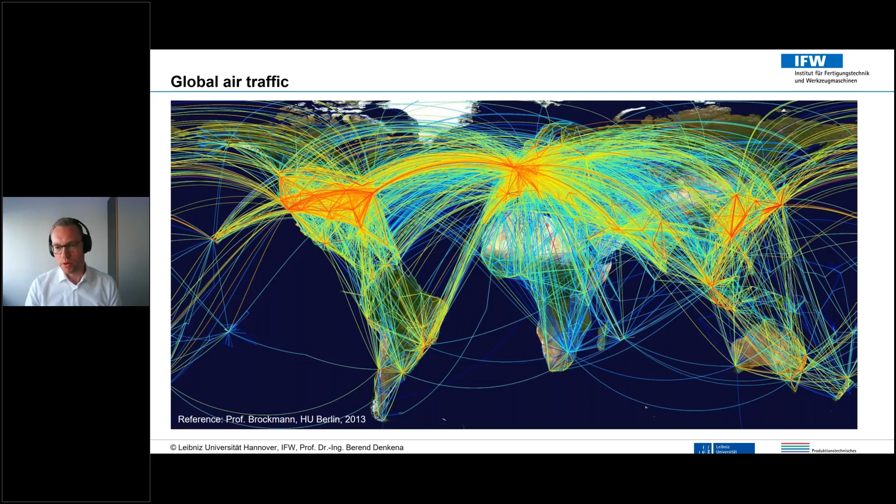So I want to talk here about the global air traffic. This is a picture about the global air traffic in the year 2013. And beside these, a lot of flights which are shown here, we have the topic of manufacturing of aircrafts. When we have a look to that topic, we have two things: first, the manufacturing, and secondly, the maintenance, which have to be economically and sustainable in the long term.

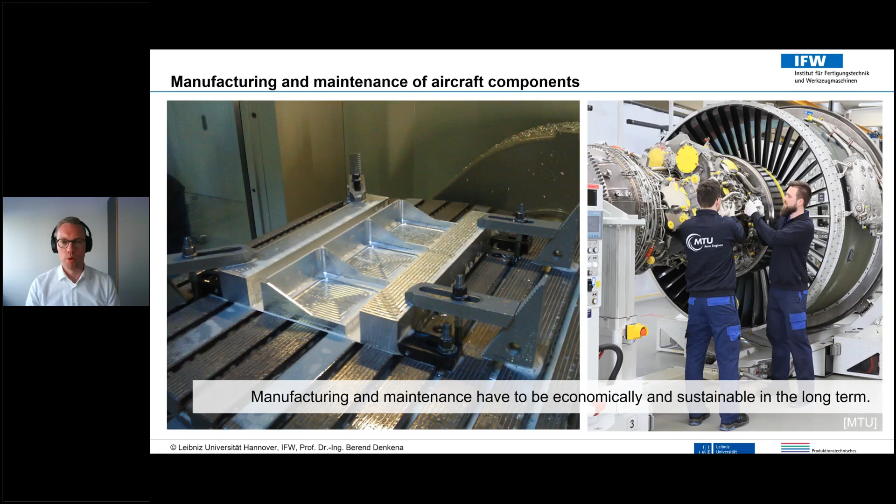So, manufacturing process chains in the aircraft industry. I have shown here 2 process chains which are important for our investigations at our institute. In the picture at the top, you can see the process chain of the production of cutting tools, typically out of cemented carbide.

We are starting here with the tool grinding process. You can see on the left side a reference workpiece with helical flutes in it. And after the tool grinding process, we have a quality assurance. Then the tool is used in a milling process, for example, or also in a drilling process. You can see here also this arrow, which is now going from using the tool from the top to the bottom into the second process chain.

And there we have the process chain of milling aircraft components, or also of repairing aircraft components. When we going ahead, you can see the quality assurance after that. When the tool was used, we can also recycle this tool and bring it back in our manufacturing to use the tool. So this is the process chains on which we have a look today.

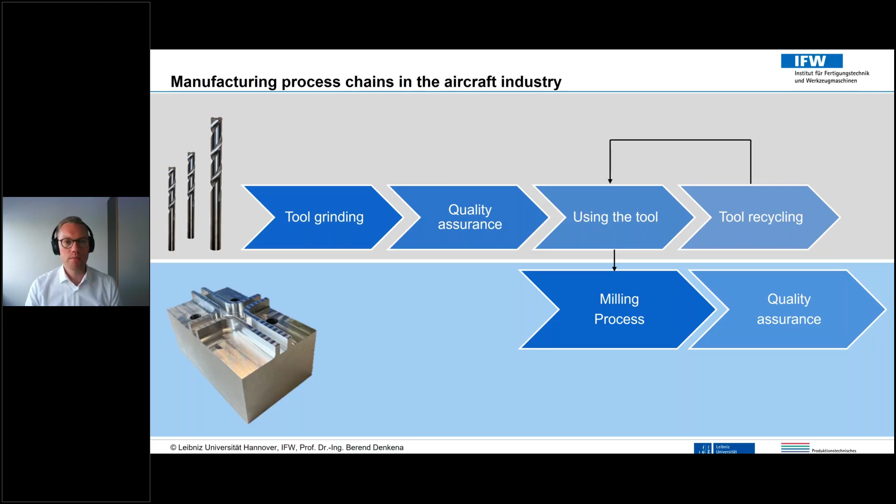And now I will come to my approach first, and I want to show you how AI models can be used in a self-learning process adaptation in these process chains.

So first, I want to start with a vision of an autonomous production system. In a typical production system, you have a lot of data. You have the value stream itself, the products, the components, the cutting tools, the processes, and the production systems contain a wide range of useful data, but the use of this data is not merged today, and it would enable an intelligent production. So merging all this data is important to form an autonomous production system.

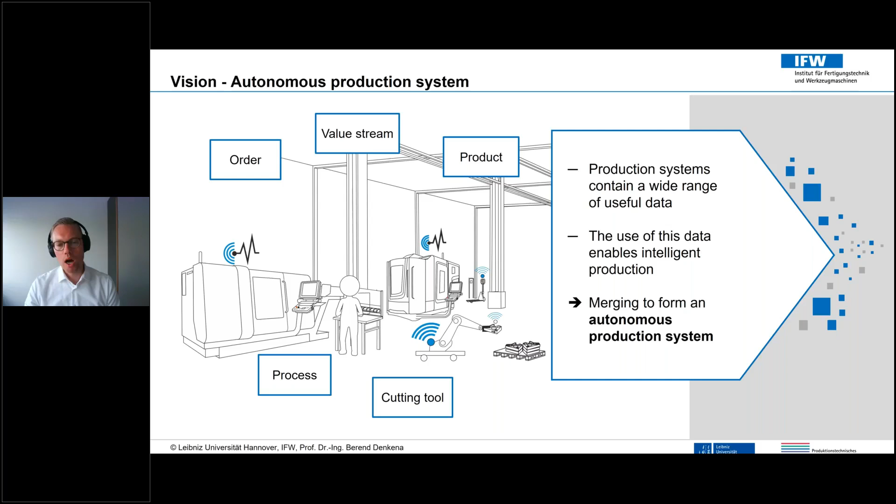How can we do that? The problem on which we are looking here is that manufacturing data is not merged today. Knowledge remains at experienced staff, and assistance systems in process planning are rigid. They cannot adapt to other circumstances. The objective here is to combine different data types, to use simulation-based process adaptation, and to realize a knowledge transfer to save resources. So in the end, we have the approach of an AI-based self-learning process adaptation, in which we are also using digital twins.

Here I show you the approach in a picture. Typically our processes will start with the process planning. After the design of a new product, we have computer aided manufacturing, and after that NC code is generated to run our machine tools.

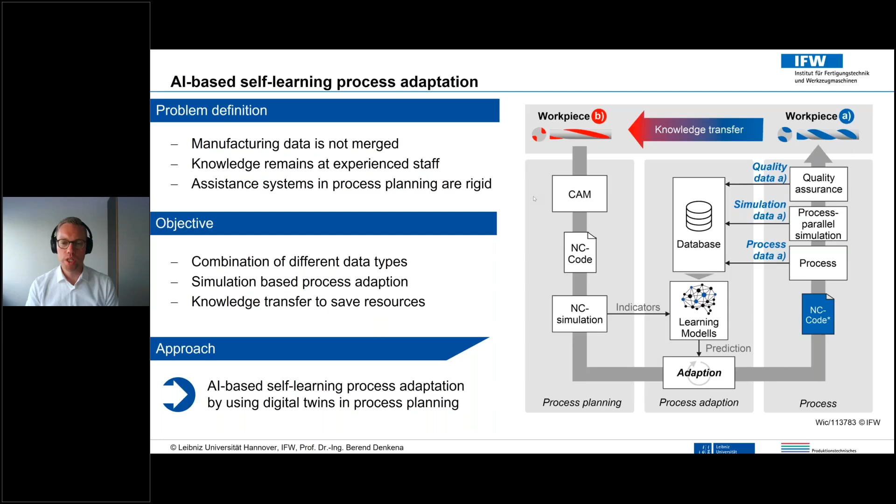We are using in our approach not directly the process. We are using first the NC simulation. This is a material removal simulation, which enables us to calculate the local cutting conditions between the milling tool and the workpiece, for example.

Local cutting conditions are indicators for learning models, and by using these learning models, we can do predictions to adapt our initial process planning. This adaptation starts before the first real process, to have a virtual adaptation and optimization of our processes.

In the end, we're having optimized NC code, as you can see on this blue color. And then we are starting with the process. I've talked before a lot about different data which is not merged. Here you can see 3 data streams which we now want to merge.

The process itself is running, and thereby we can use, parallel to the process data, for example out of the machine control, spindle current or axis currents. Additionally, sensor data is also a thing which can be used here. And then we are using the axis data of our machine tool to run a process parallel simulation.

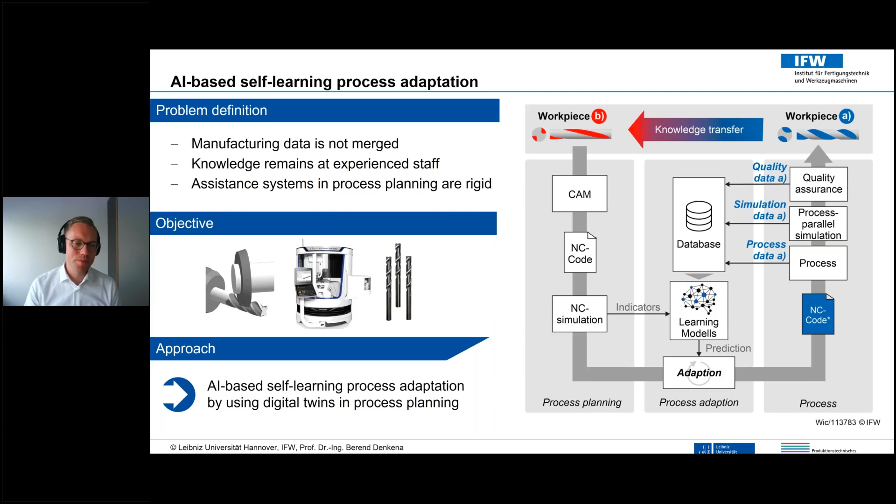So here you can see also these 3 data streams again. Then I want to come to my 3 use cases in which I want to show you that approach, and in which I want to show you also digital twins or process parallel simulations which are used here. So let me first start with a digital twin in tool grinding.

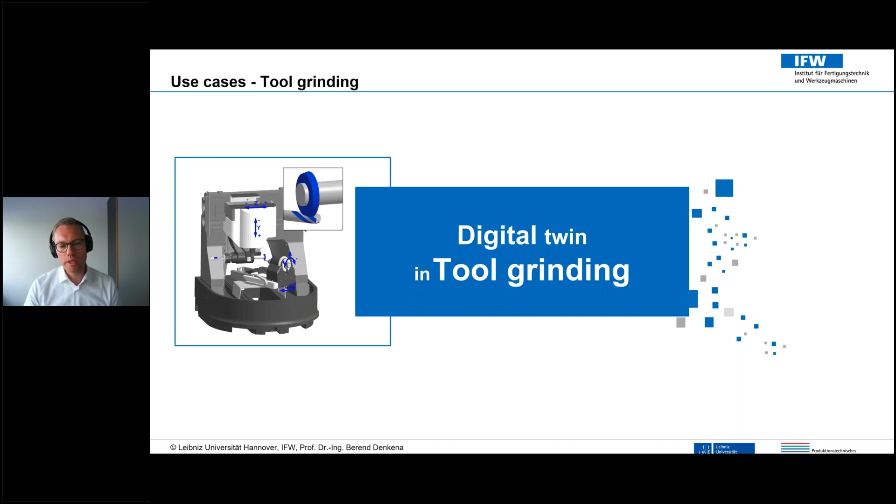Tool grinding is typically shown here. So here we have a helical flute grinded workpiece, but the process itself can be seen here very well. The grinding wheel is going through the workpiece, and typically we have additionally cooling fluid, and that's the process itself.

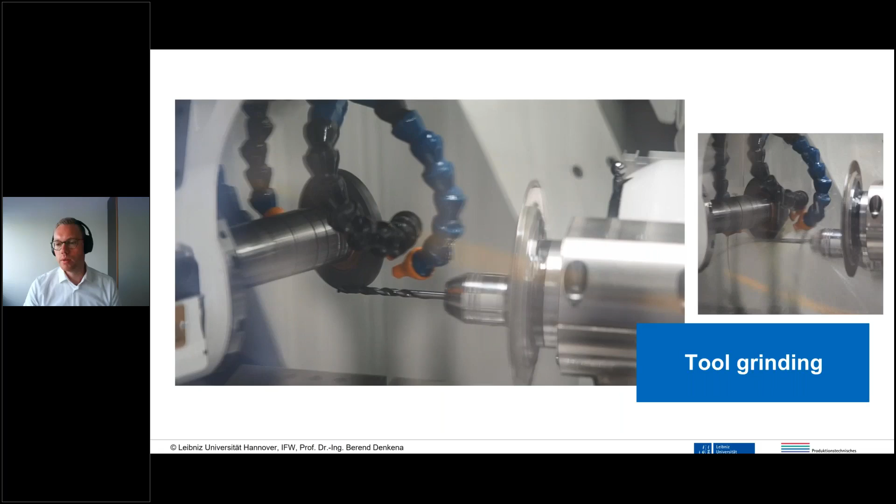When we have a look at our digital twin in tool grinding, you can see here on the left side the real manufacturing, the real machine tool, and the grinding wheel, and also the workpiece and the resulting workpiece, for example here after helical flute grinding.

On the right side, you see the material removal simulation. And these both worlds are now combined by using data streams. First, our axis positions to run a process parallel simulation. And also you can see here the 3 data streams: process data, quality data, and simulation data. All these data streams are going together in a knowledge database.

I think the idea here is to use these local cutting conditions, which you can see here, and the data can be saved by using the cutting conditions generally. So when we have a new tool, maybe similar cutting conditions are resulting also by grinding a new tool, and thereby a knowledge transfer is possible.

In this video, you can see the process parallel simulation. The tool grinding machine is running. It can be seen better when we come to the second flute after the first, and the simulation runs by using the real axis data. So also when we change, for example here the feed rate directly at the machine tool, our simulation will show the same behavior as the reality.

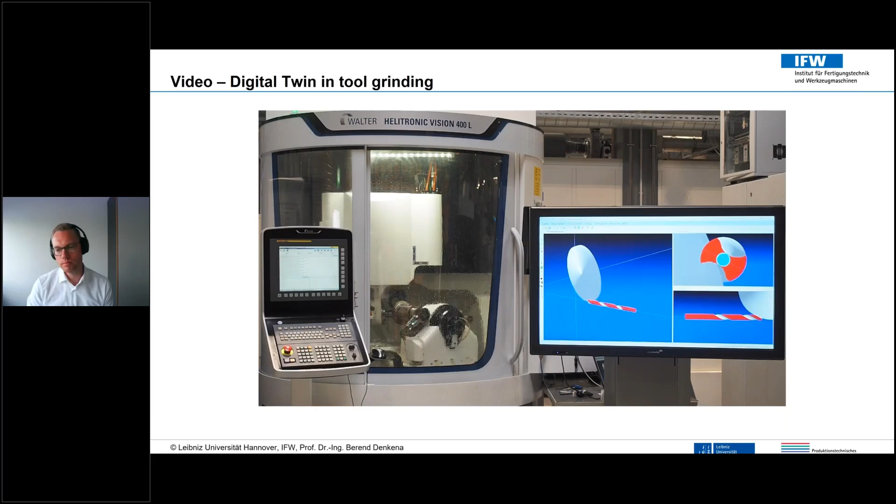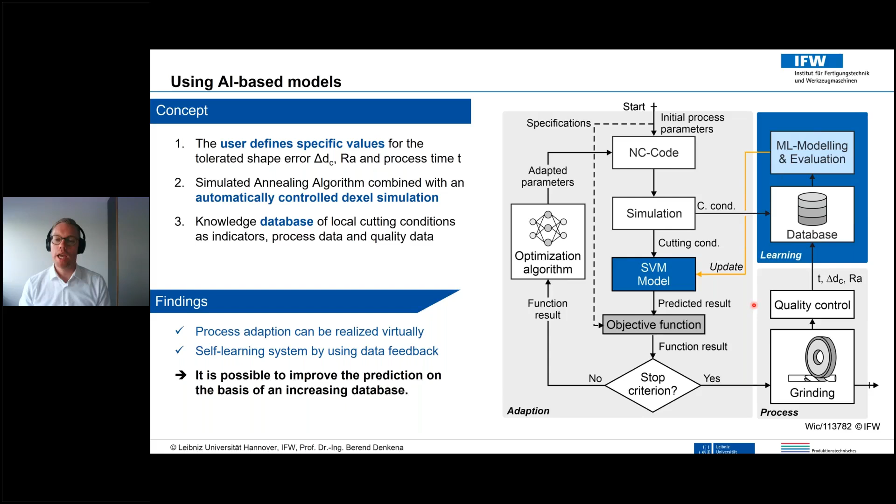So this is really important to see how this data can be used after our process optimization to make the AI-based models better in the end.

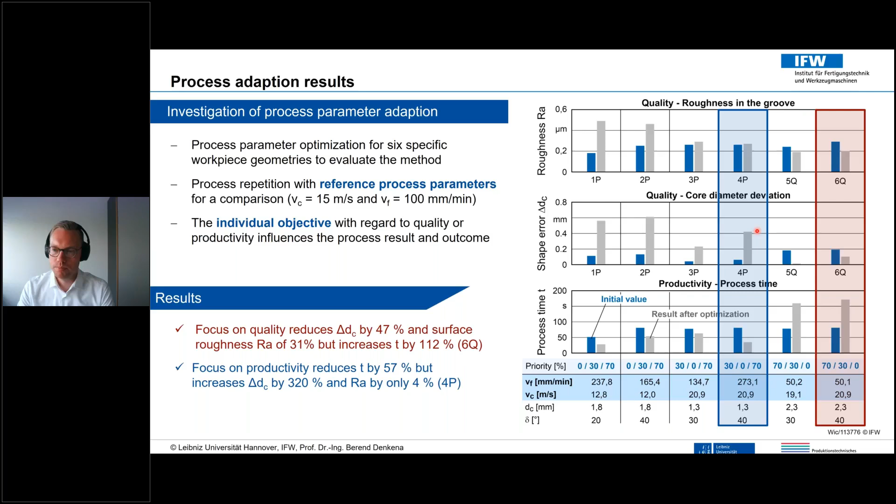The second example is shown here, in the blue box, where we adapt our process regarding productivity. As you can see, process time is going down, so we have a faster process, but our shape error is going up. Our process parameter optimization, in this case, also has the goal to optimize our surface roughness. Here it can be seen that it's possible to have the same surface roughness but a faster process, for example. So these are our first results showing how these AI-based models can be used.

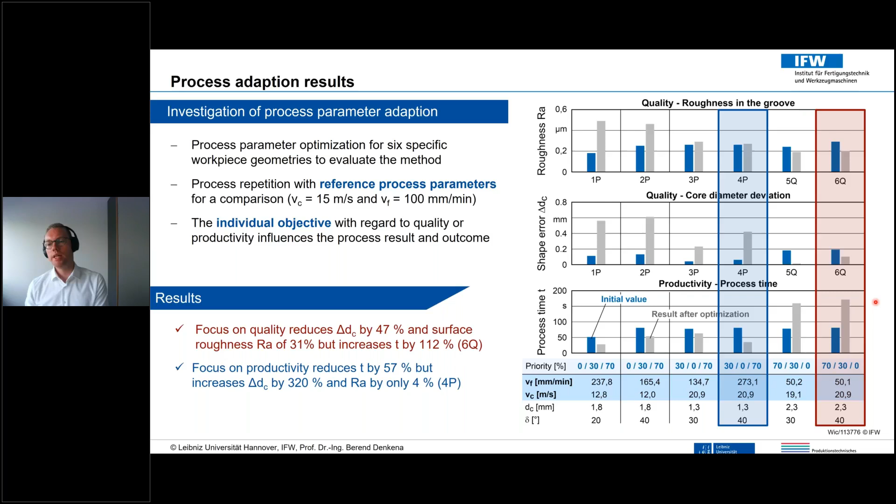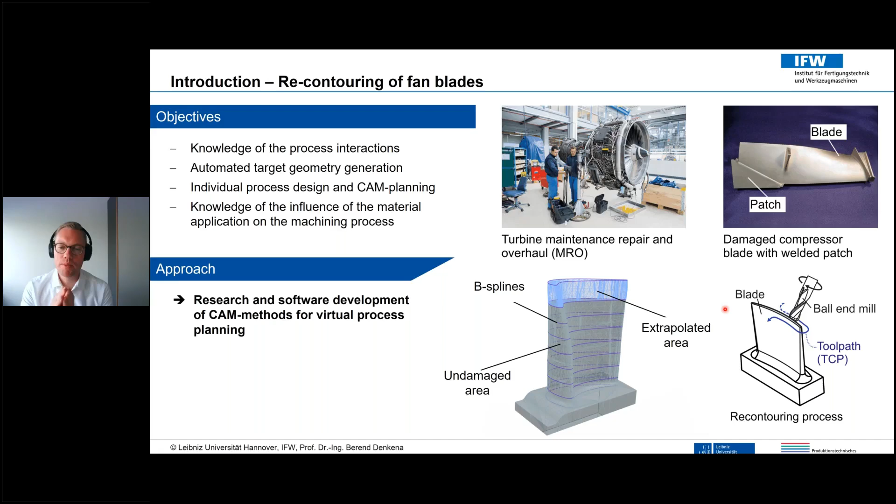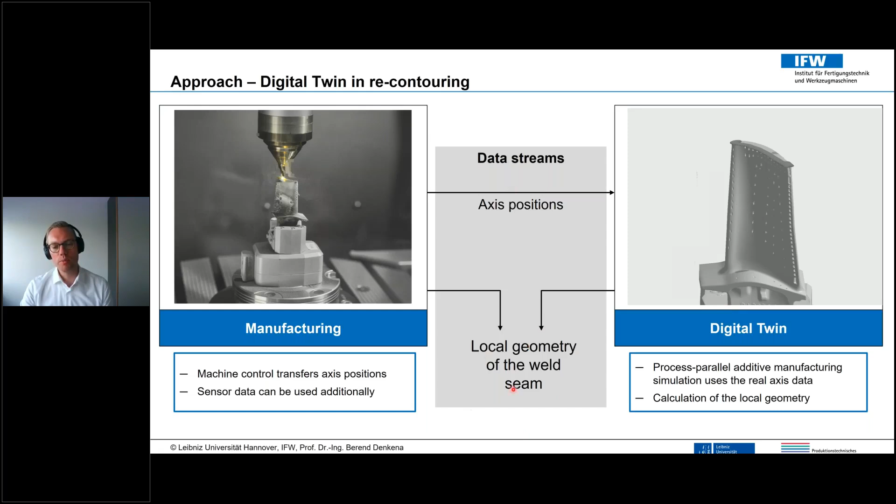The important thing is that we want to generate the local geometry of our weld seam, which can then be used in process planning. Also here we have models. For example, there's the question: how high or how wide is our weld seam in this simulation? The axis positions can be used directly from the machine, but the question is how the weld seam looks in the end.

And here's additionally a second use case, for example, for AI-based models in the future. We are using a data feedback to generate these models, and they use the current I and the feed rate to predict our weld seam height and width. It's really important to have such prediction models.

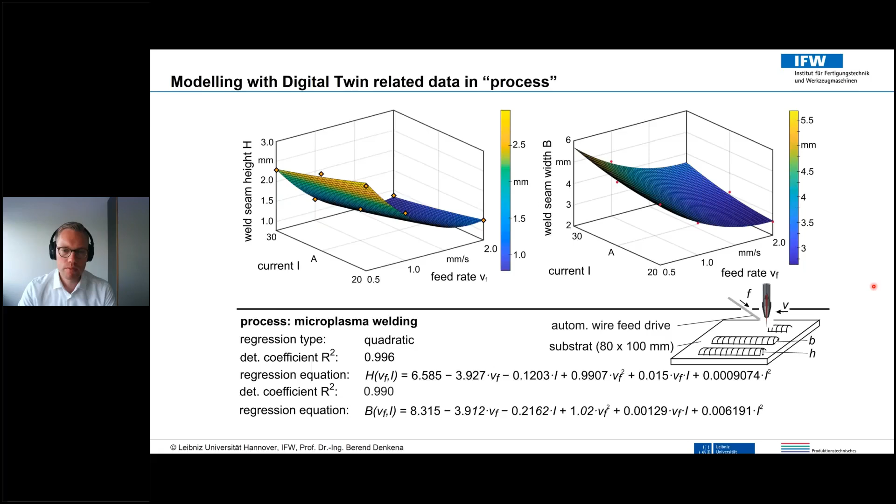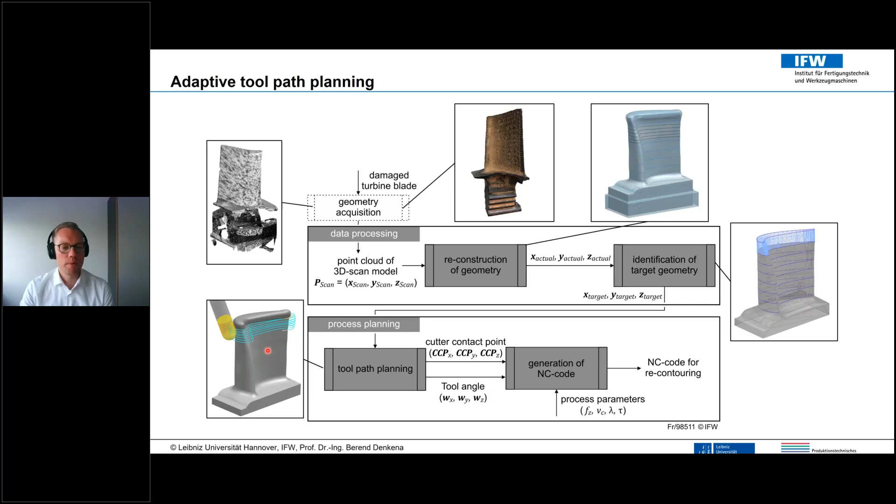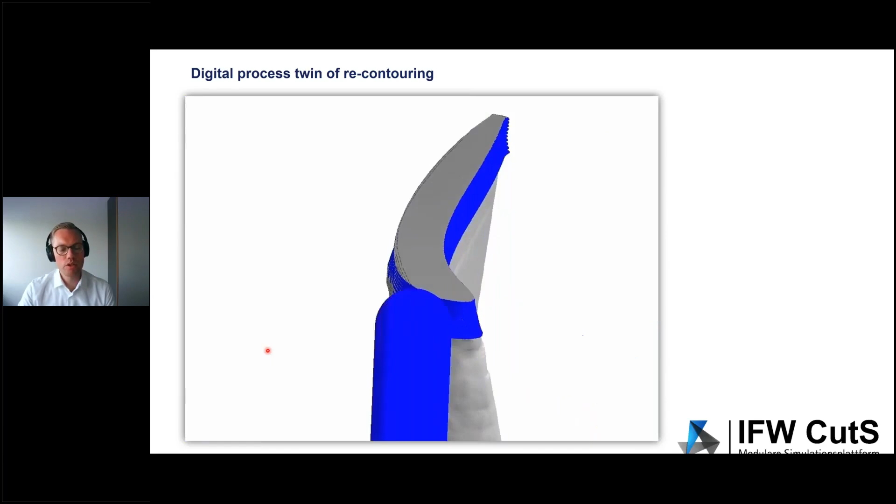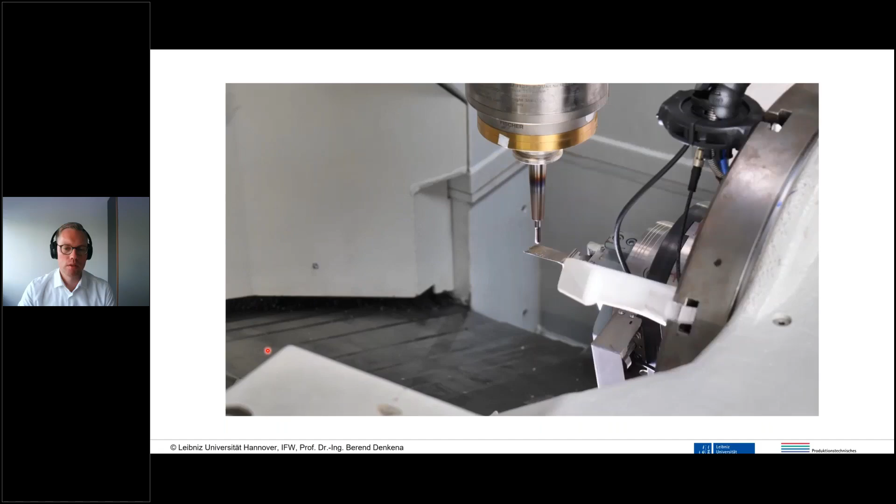And here you can see again a video of our simulation of the recontouring process. When we use our digital twin of the welding process in these simulations, it can be better simulated in which cases we have more material removal, in which cases less, for example. And in the end, you can see here the real recontouring process, in which it's very important to have an optimized toolpath planning.

Now I will come to my last use case. In this use case, I want to show you digital twin in quality assurance. So after generating or grinding a cutting tool, after using this cutting tool in repair processes, here we have a look at our quality assurance, maybe after repairing a component, or also in the case of new manufacturing of a component.

On the left you can see a reference workpiece out of our investigations. So the topic here is inspection planning. Typically quality control or quality assurance has to be planned, and economic planning is really important to ensure good quality but also to do it economically. A one-time execution of this work planning is extremely time-consuming and cost-intensive, and that's why we want a better, intelligent inspection planning.

The challenges here are that there's currently low availability of production data. We want to synchronize significant machine, sensor, and simulation data to realize a virtual quality inspection. So feedback knowledge from quality inspection to inspection planning is important here, for targeted planning of quality inspections to avoid unnecessary inspection efforts.

In the image on the right side here, you can see this approach. We have our initial inspection plan, and again our milling process and the real axis data is used to run a cutting simulation. We have the cutting conditions, we have a digital footprint, and our AI-based quality models predict the quality, which can be saved in our digital twin. This is important to adapt our inspection planning.

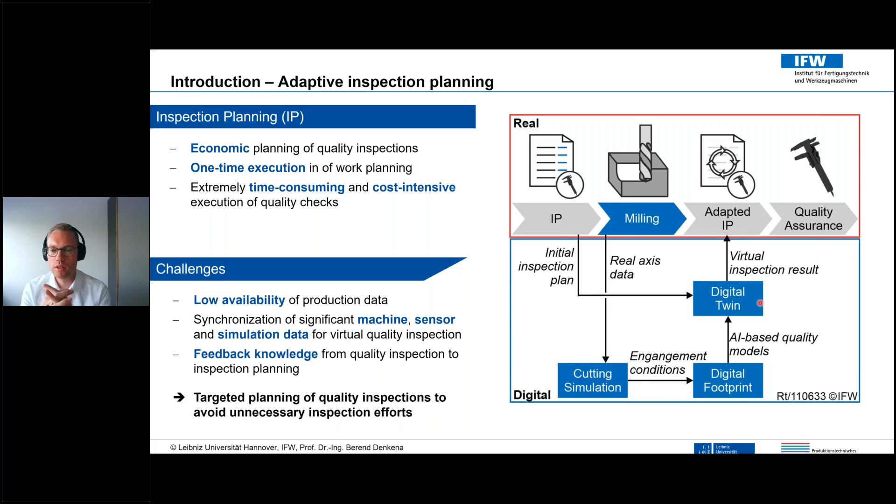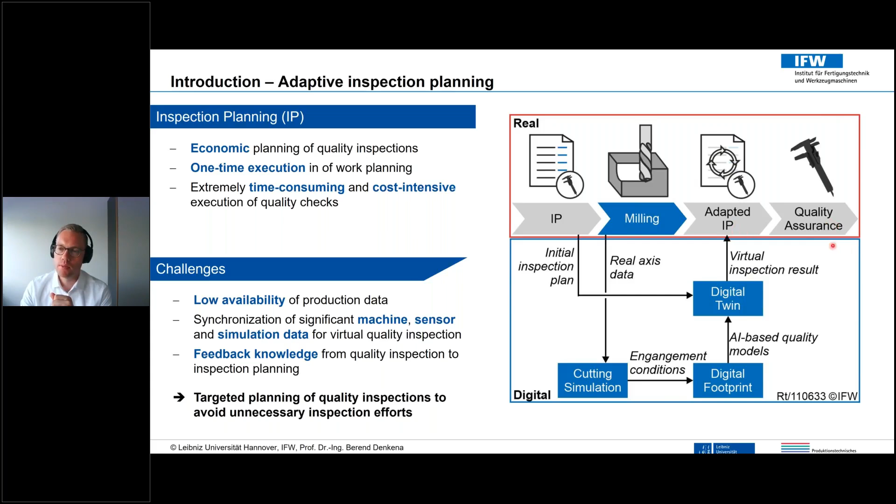So please imagine when our digital twin can show us, by these predictions, on which positions it's more important to have focused or more inspection - that would save resources, because other aspects don't have to be focused on so much. In the end, we have an adapted inspection planning and a better quality assurance. So that's our approach.

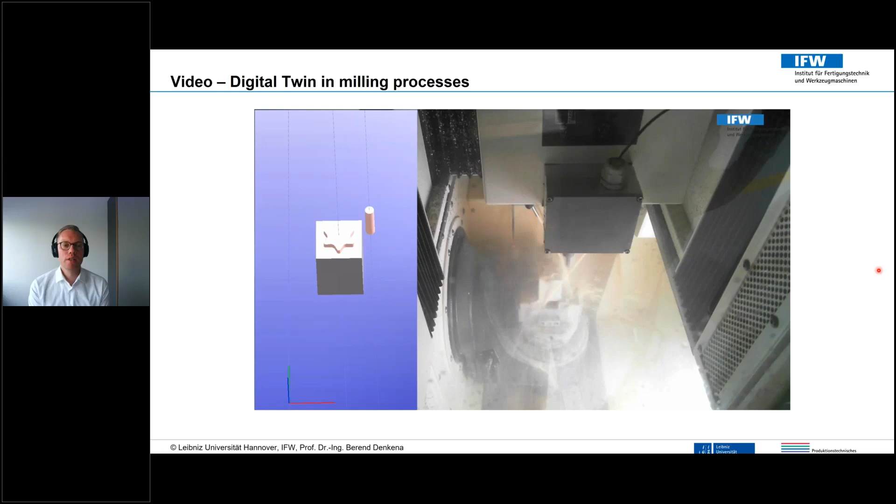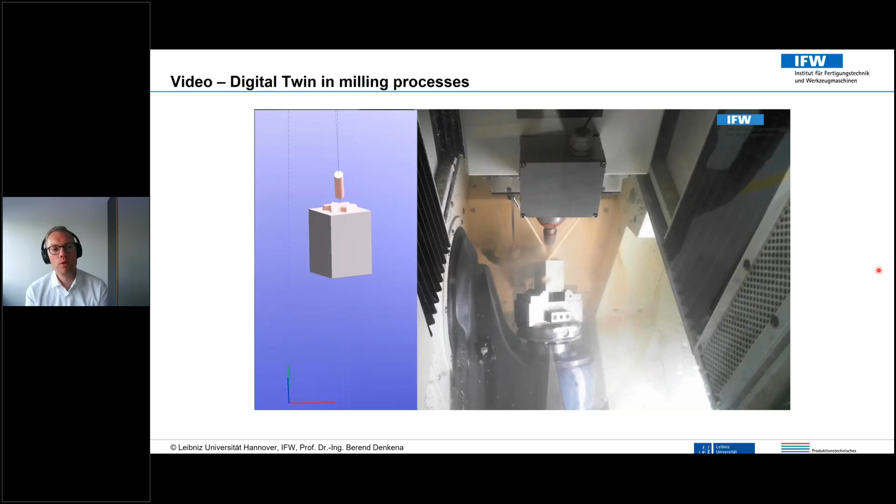First, I will show you a video of this digital twin again, so that you can imagine how this will be looking. So here we have a reference process with a star geometry, but it can be seen very well also for a 5-axis process in this case, how such a process parallel simulation can be run and how the simulation will generate important data for the local cutting conditions.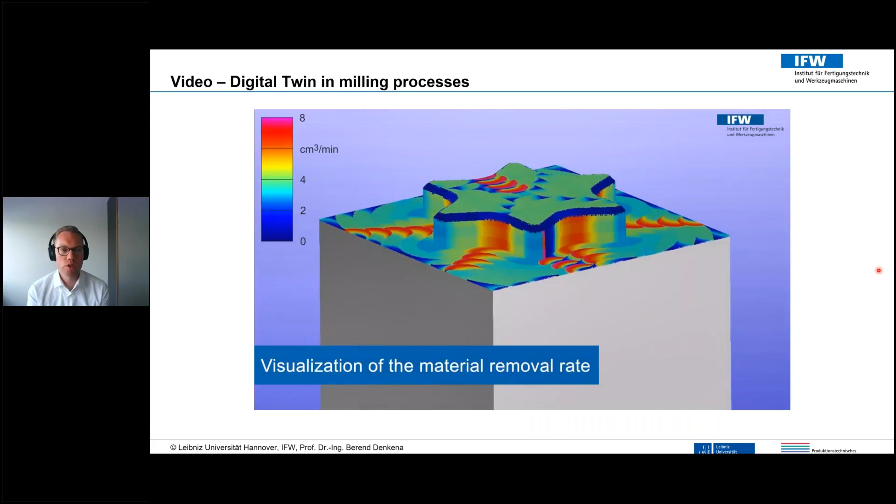So that can be seen here now. So here this local cutting conditions are visualized. For example, here's the material removal rate. And here also the local depth of cut and so on.

But as I said before, how in this case can this data be used to generate AI-based models and to make the process predictions also better?

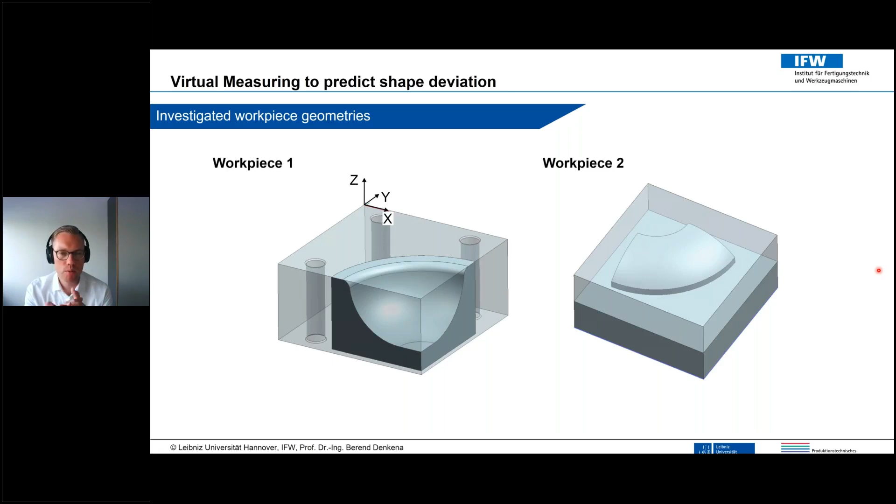Here we have investigated two workpiece geometries. So on the left side, workpiece 1, on the right side, workpiece 2. And here you can see a result for having AI-based models. So we're using here again a support vector machine with a training data set of 70 workpieces. And we are modeling the shape error in ball end milling based on simulated local cutting conditions.

So thereby we can show that a sufficient model quality can be achieved for a kinematically more demanding use case, with small training data sets, and it's possible to transfer knowledge to other workpiece geometries. That can be demonstrated thereby.

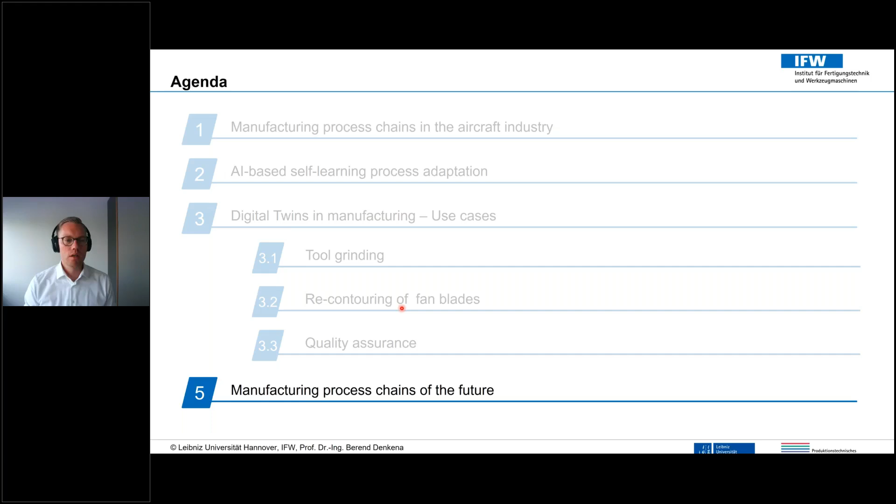So a lot of twins are coming into our production system, but this is really important to generate more data, to save data, and also to use, thereby, AI-based models in the end. And what is really important here is to show that our twins will be influenced by the reality and also influence the reality itself in a feedback. So that is an important aspect when we will have a look at twins.

First question: looking into the grinding process, which is a complex process as such, all three topics are working together real time, right? If you look into other processes, are there time constraints depending on the complexity of the process, the tool, the simulation, which give you problems to install such an AI-driven optimization?

Yeah, so maybe we have to separate that. It's not really important to have these AI-based predictions parallel to the process. For us, it's more important to save all this data parallel to the process. In our approach, we want to make future processes better, so adapt the planning of, for example, the next batch size which will be manufactured. Thereby, we don't have this time problem for the adaptations of the next process. But the simulations can also be run for faster processes parallel by

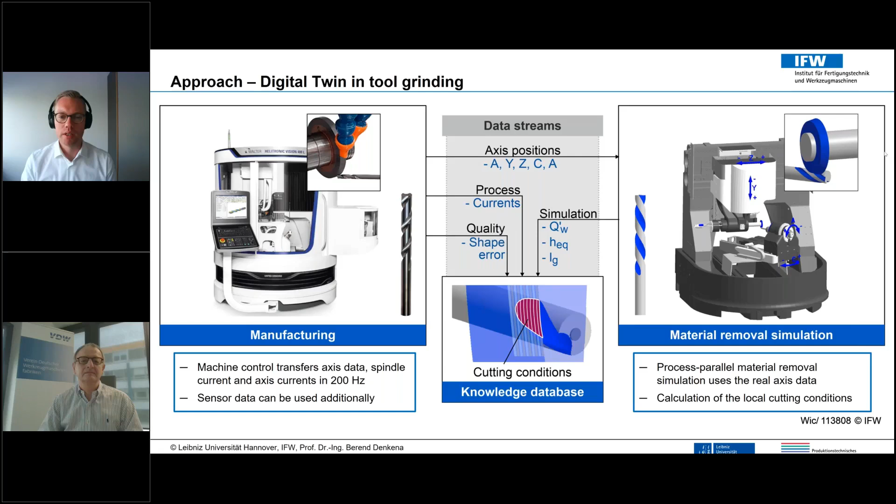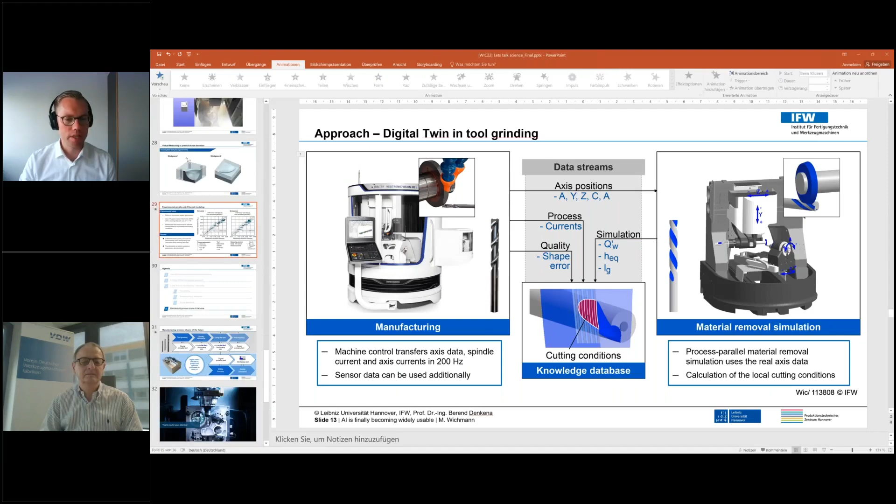AI methods typically must have a lot of data to be good. For example, image processing using neural networks, there a lot of data sets are used, 10,000 or 100,000 for example. The question is, how can we use AI also in cases with not so many data sets? We have seen in our investigations that methods like the support vector machine can be used better for smaller data sets. We also have other investigations using neural networks, but in those cases, a lot more data has to be there. That's why in this case, we are using a support vector machine.

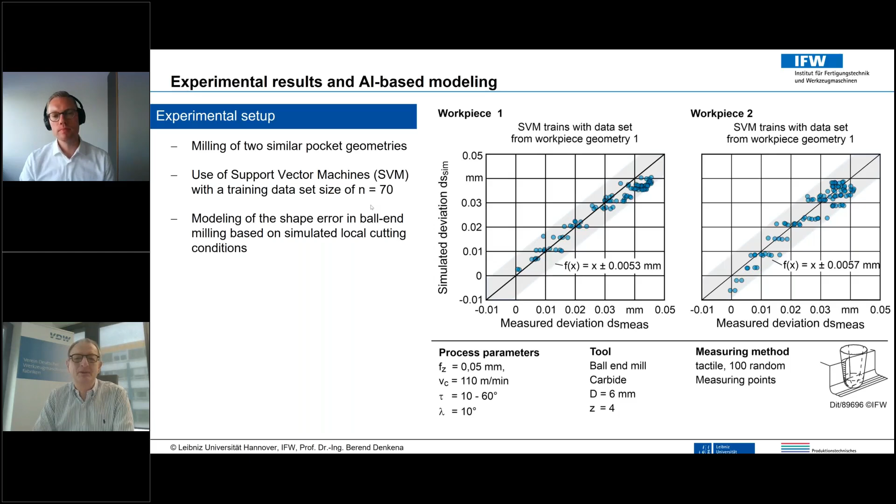This question came up with your second use case, where for these repair processes, it's more or less a one-piece process. Can you learn such a model out of more or less similar other repair processes in this area, so that over time you can optimize it?

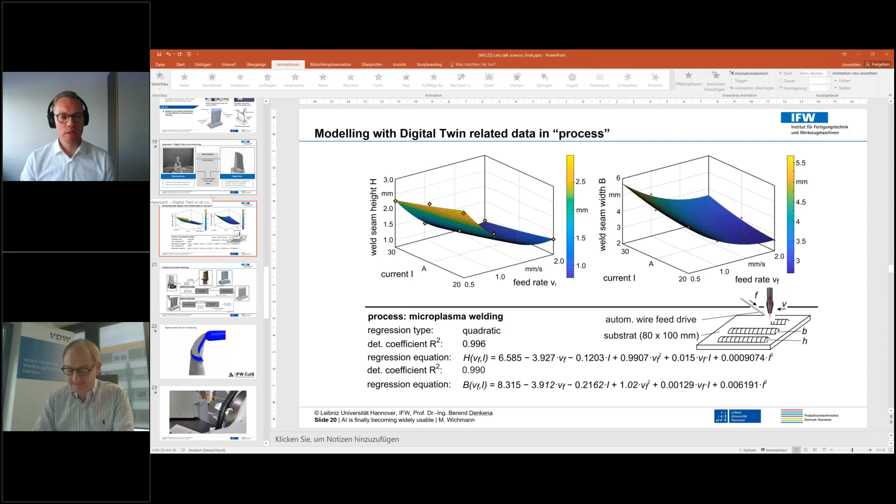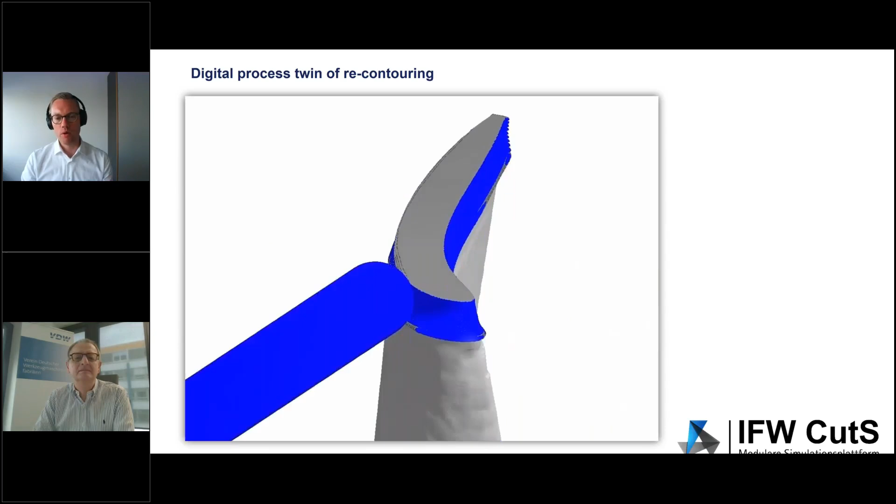Yeah. I think what's really important is the idea of our local cutting conditions. For example, when we have in this simulation predictions for the shape error or predictions for the material removal itself, it's important that we don't just have one value at a time step, but a lot of values. When you imagine that our cutting tool can be discretized, like the grinding tool I showed before, it's possible to calculate a prediction for each single cutting condition. In the next fan blade case, in the next repairing case, the geometry itself is different, but we can find similar cutting conditions in it, and thereby it's possible to transfer it.

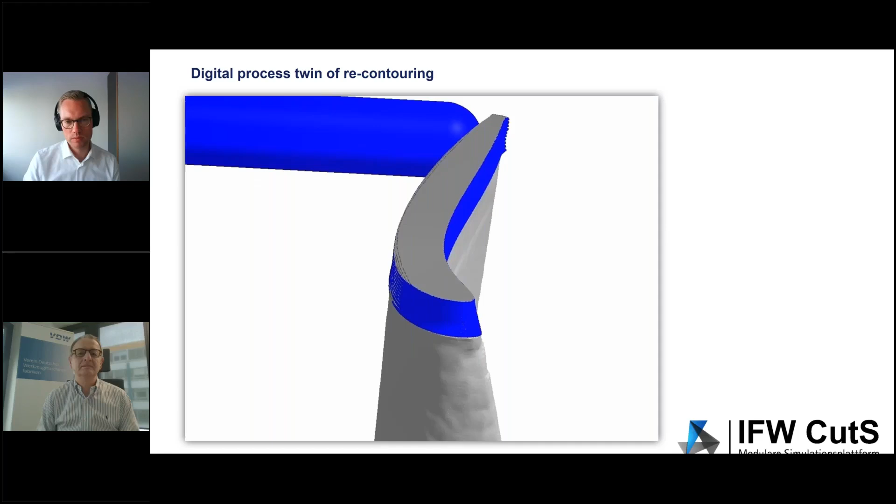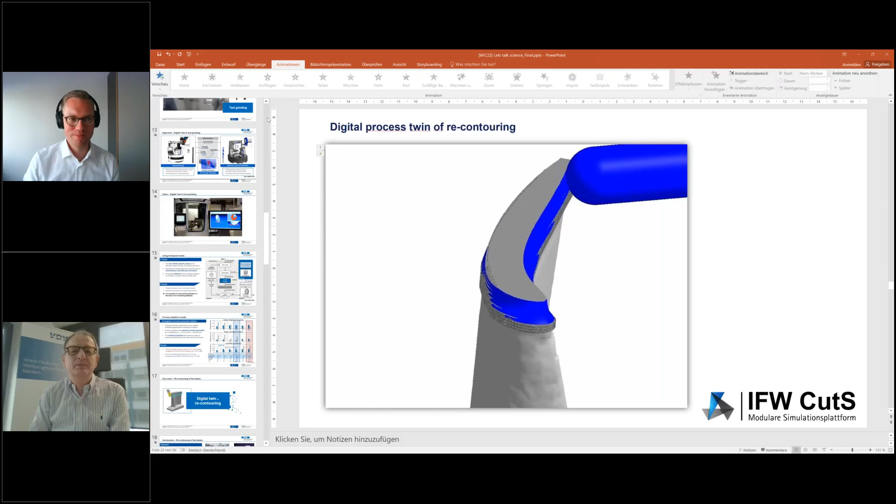Okay, well I think this has been all the questions. Thank you, Mr. Wichmann. I think it's a very interesting and also important topic for the future of production, as you have already mentioned, and I wish you all the best for your future research work.